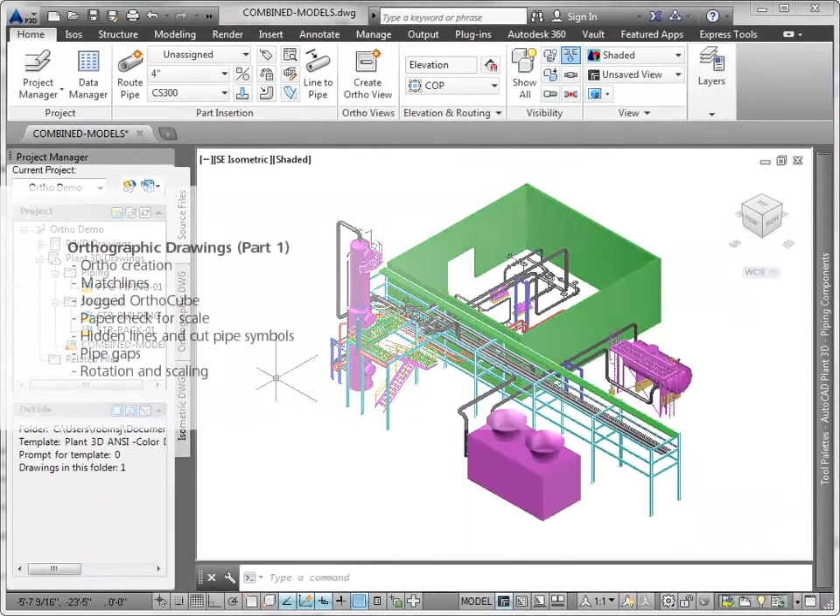In this video, Orthographic Drawings Part 1, I'm going to show you ortho creation, match lines, a jogged ortho cube, paper check for scale, hidden line representation styles and cut pipe symbols, pipe gaps, placement, rotation and scaling. In Part 2 we'll explore the ortho section of project setup, including paths, elbow centerline display, editing the title block, and layer mapping, and we'll also look closely at annotating and dimensioning.

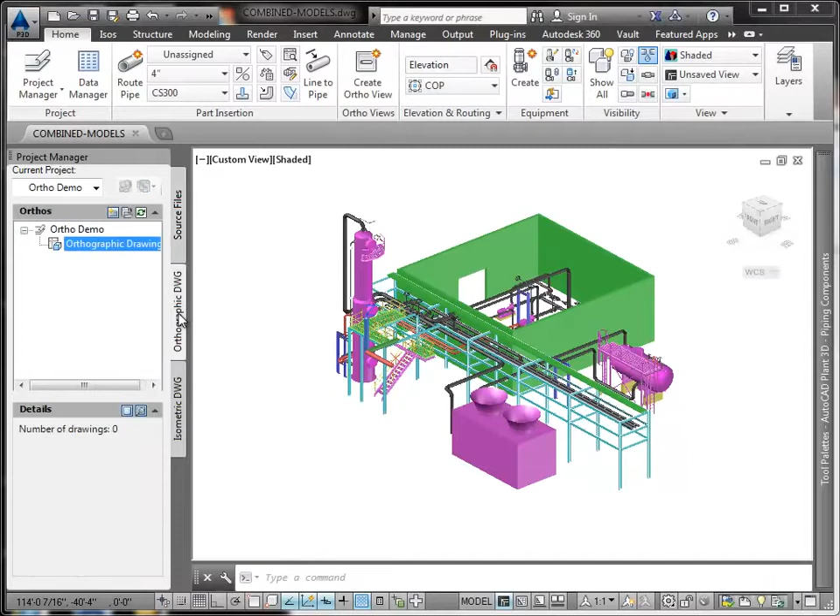I've created a project called Ortho Demo. This model includes XREF, structure, and piping models. I could start by clicking Create Ortho View on the ribbon, but for this example I'll go to the Ortho tab in the Project Manager and create the new ortho there. I enter a file name, in this case Plan View, and then click OK.

Now I click New View on the Ortho View ribbon. A preview drawing displays the transparent green ortho cube, which defines a clipping range and is the only object that can be edited in the preview drawing. The transparent red side shows the view selected, the top view.

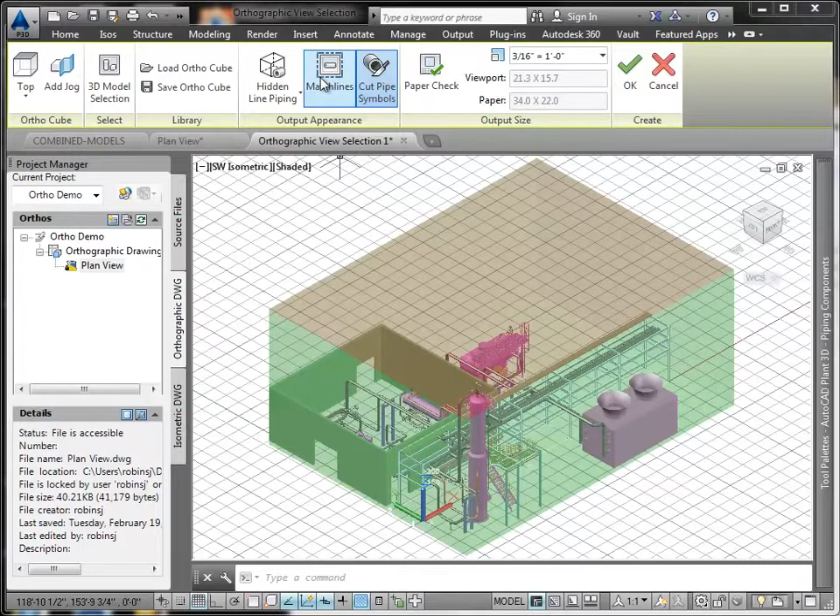Clicking on match lines will create match line annotation automatically. Clicking Paper Check in the ribbon allows you to quickly check the scale of the drawing. The Hidden Lines Piping button allows you to select where the hidden lines are to be shown dashed. Now I can click OK to place the drawing view in the sheet and start the drawing creation.

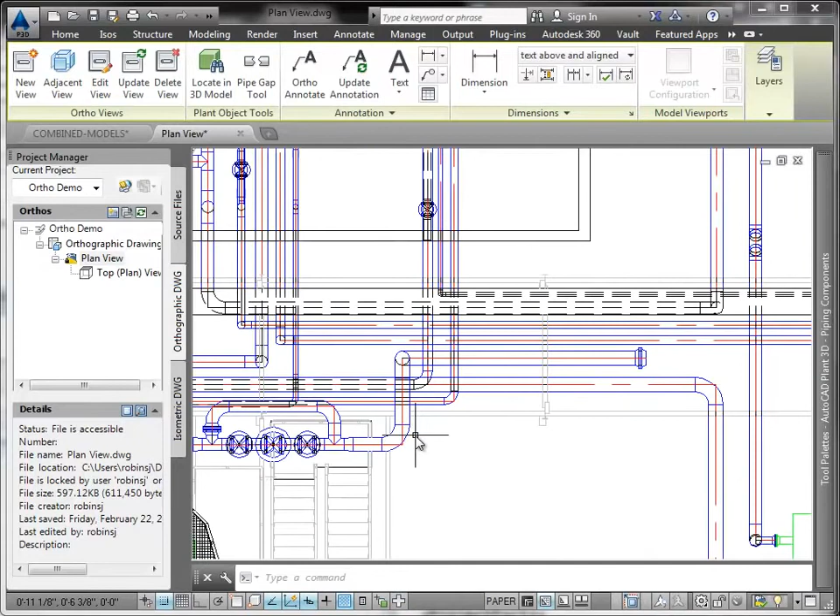So here is our plan view. Notice the dashed lines for hidden pipes and the match line annotation.

Now let's edit this view to create a jog in the ortho cube. We click Edit View and select this view. Now we'll click Add Jog in the ribbon, and click on this rear bottom edge to create a section jog, as you see here.

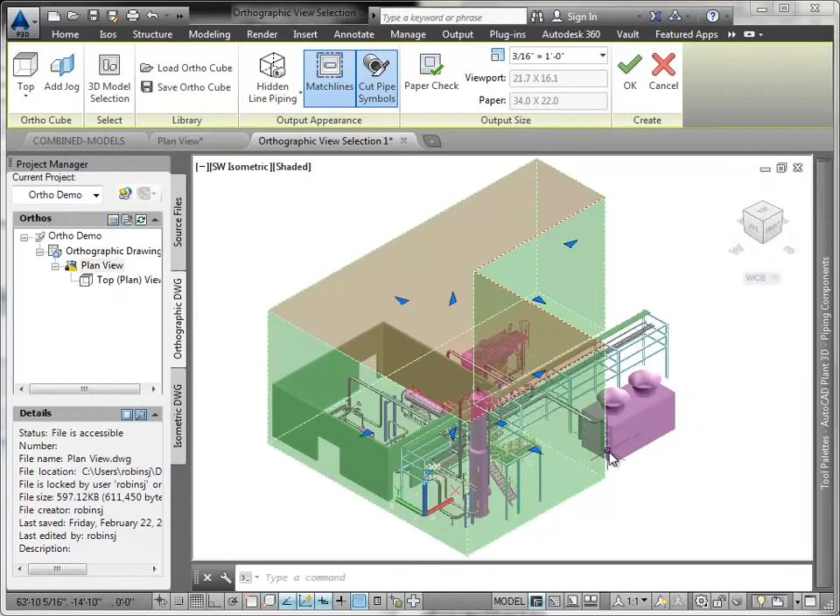We can switch to a top view to adjust the jog. We simply move them around until we have a satisfactory view. We can change the type or whatever, then Create the New View automatically updates the view for us with the new jog.

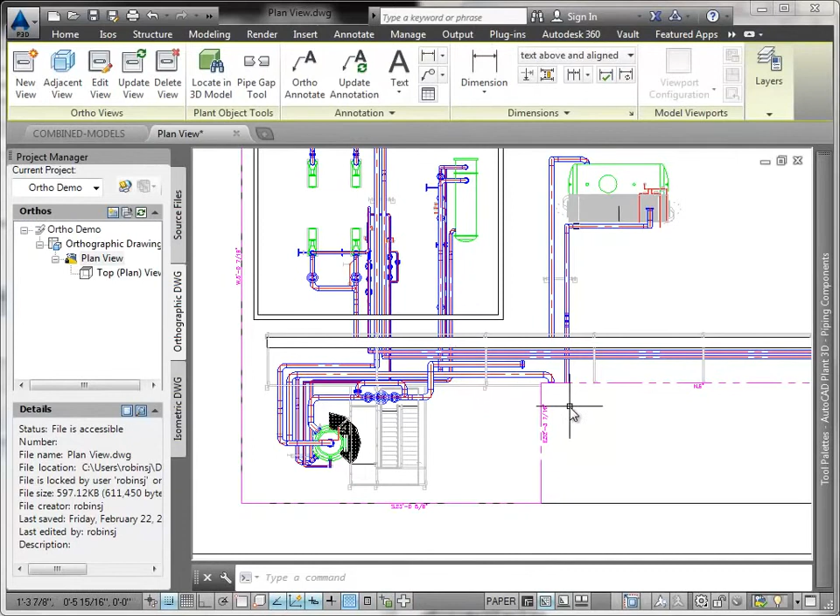Now here's the new view. We can jog as much as we like to create a complex jog.

Now I'd like to show you how to make a gap in a pipe to see what's behind. Using the Pipe Gap tool, I select the pipe, define the gap by using the grip, and then update the view.

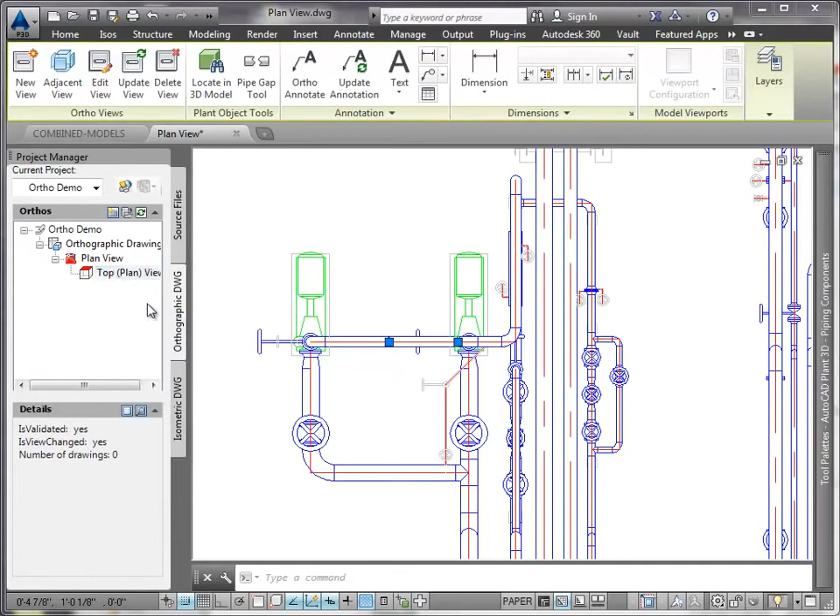Here we right-click on the view. Now you can see the hand wheel.

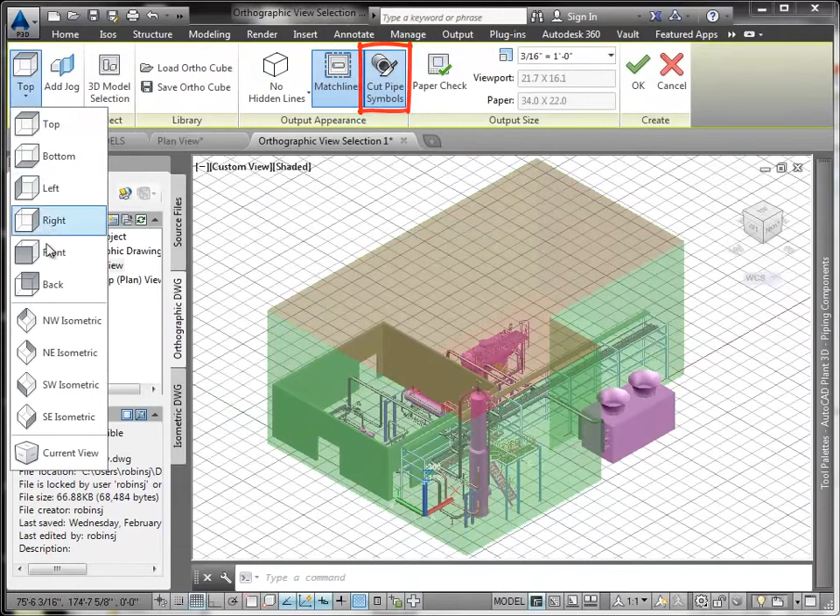So now let's quickly edit the view once again to show you cut pipe symbols. This time, instead of top, we'll select the front view. Cut pipe symbols are set to show by default. When we zoom in, we can see the cut pipe.

Now let's go back to the piping model and create another drawing view. I'm going to prepare the model by selecting the line number of interest and the equipment. We've used the Select by Line Number and then the Hide Isolate commands in order to prepare our model.

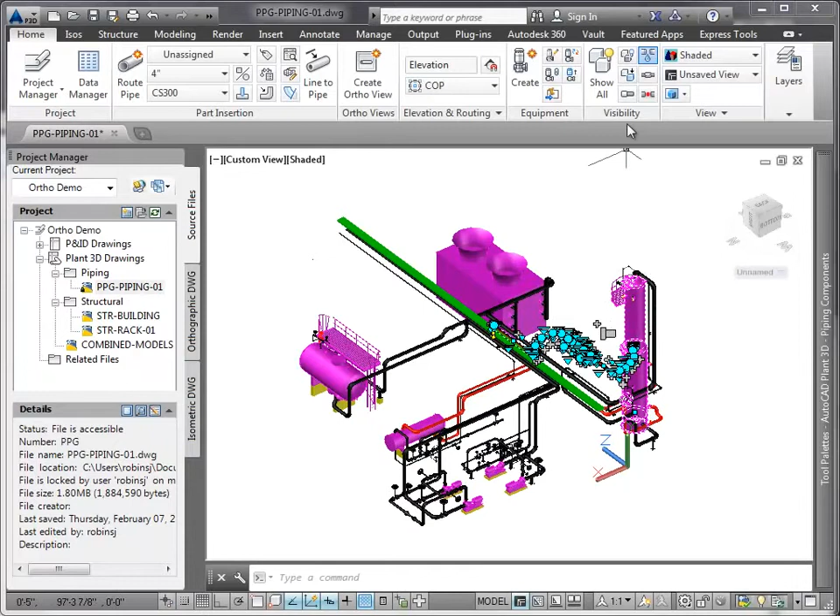Now we're done. We click the ribbon command and click Create New Ortho View. We create a new drawing called Line 10001 and click OK.

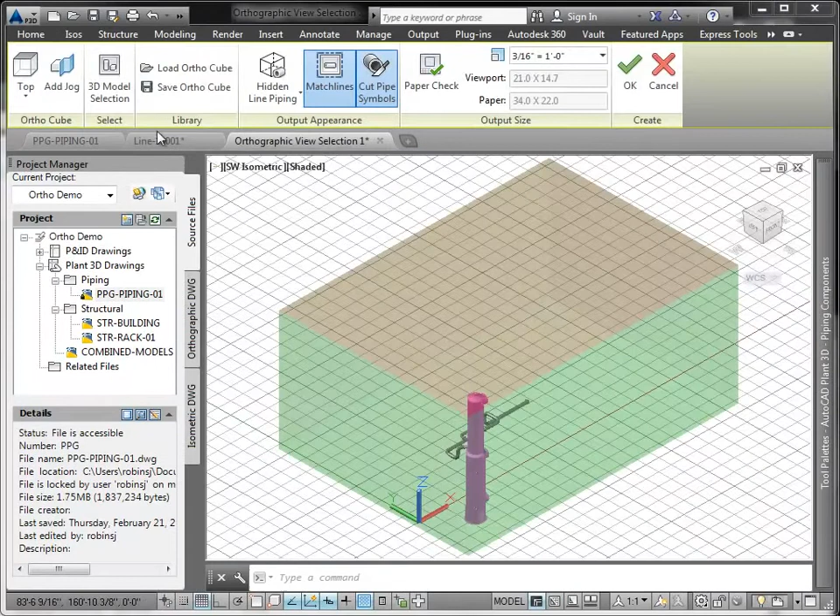The preview drawing appears, and this time I'm going to add another model by choosing to add in one of the structural models. Then I can see my pipe on the pipe rack in the ortho cube.

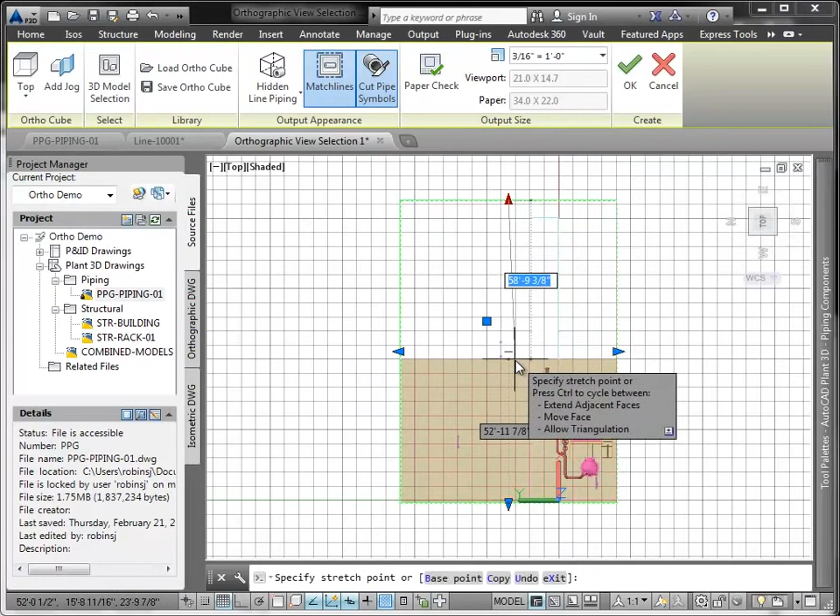Now I'll move to a top view, which makes it easier to set the cutting plane, and I'll resize the ortho cube. Let's bring in the sides a bit so we're clipped to where we want to see.

Now we can save this ortho cube by using the Save Ortho Cube command. We simply give it a name and click OK.

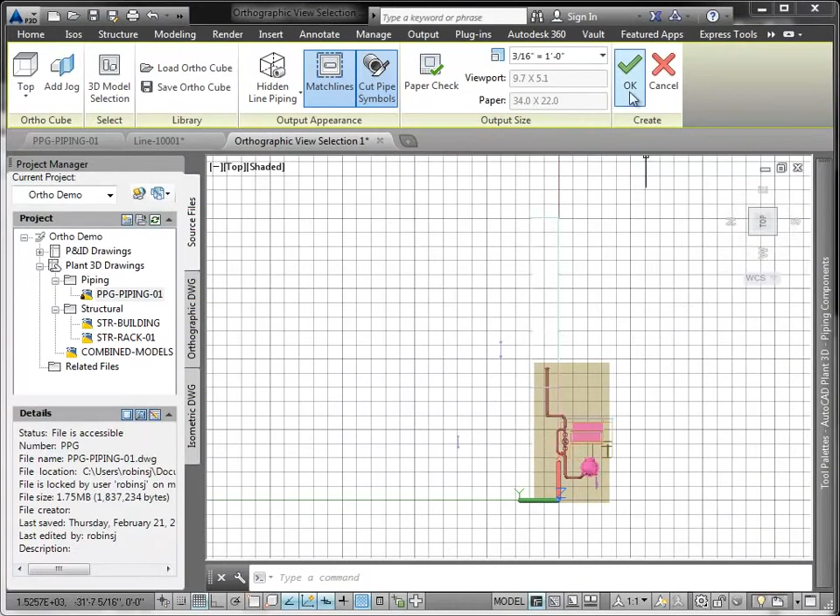Now let's go ahead and place this view in the drawing in the upper left hand corner. There we go. Now let's create another section.

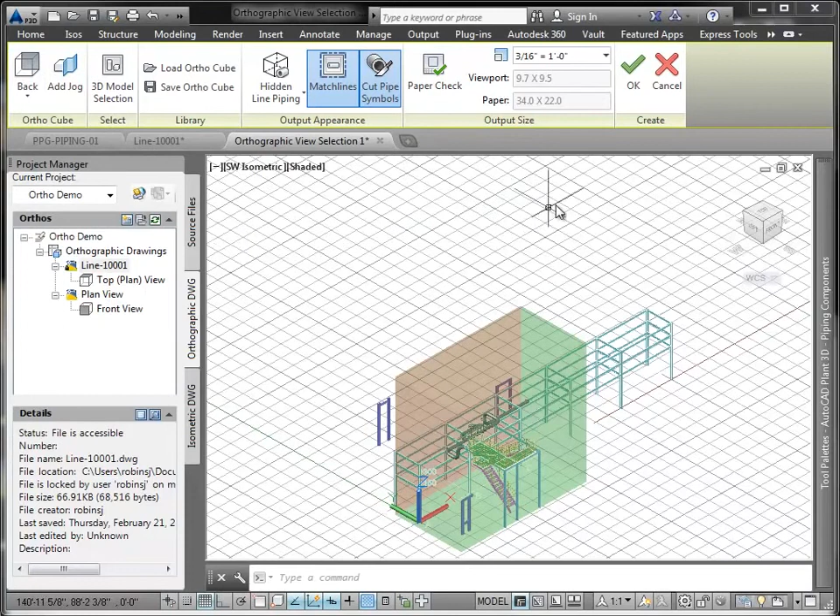So we'll click New View, select my models, and we now load the ortho view that we had created before. Let's move to a back view, and now we'll generate the next view as you see here.

Now let's create another view. This time we're going to select just the pipe, and we'll reuse the same ortho view to set our cube dimensions.

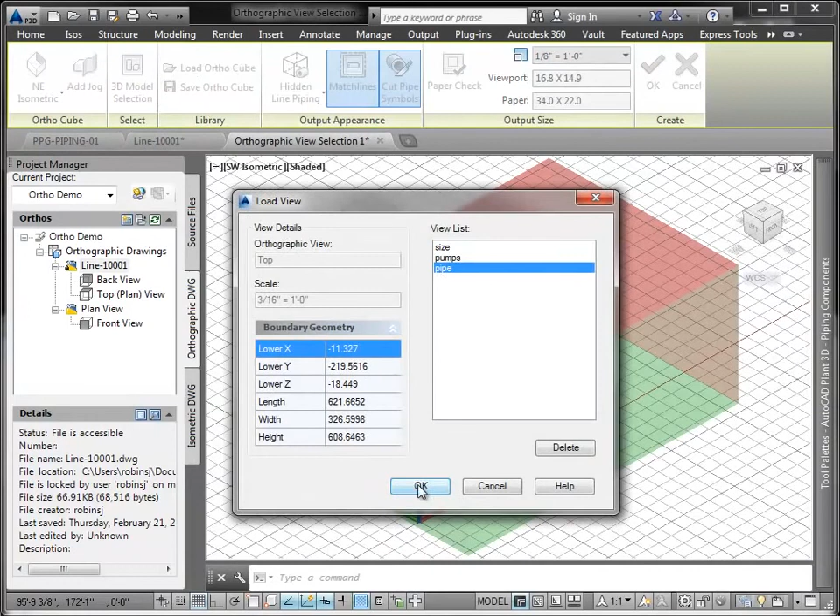And this time let's create an isometric view. We can use the cube to rotate that view in any direction we like, as you see here.

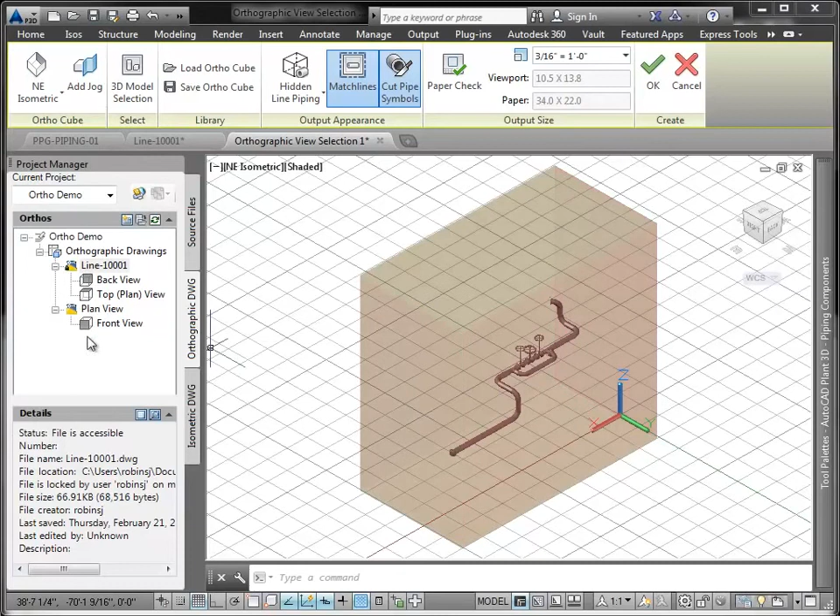As I place it, I see I'll need to adjust the scale. I can use the in-place menus or the command line to select the new scale for this particular view.

So let's go ahead and select a more appropriate scale and place the view where we want it. There we go, there's our new ISO view.

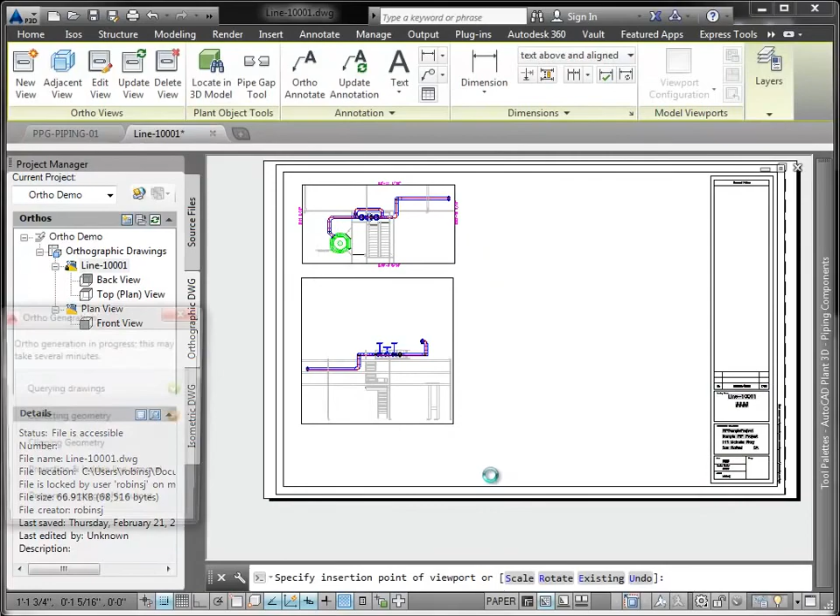Earlier I published a 3D DWF of the same line and added it to my ortho drawing using the DWF underlay functionality. So now we have a 3D rendering as well as an ortho version of our pipe in our drawing. You can also use AutoCAD's rotate, move and align options to create ortho views aligned to non-WCS piping.

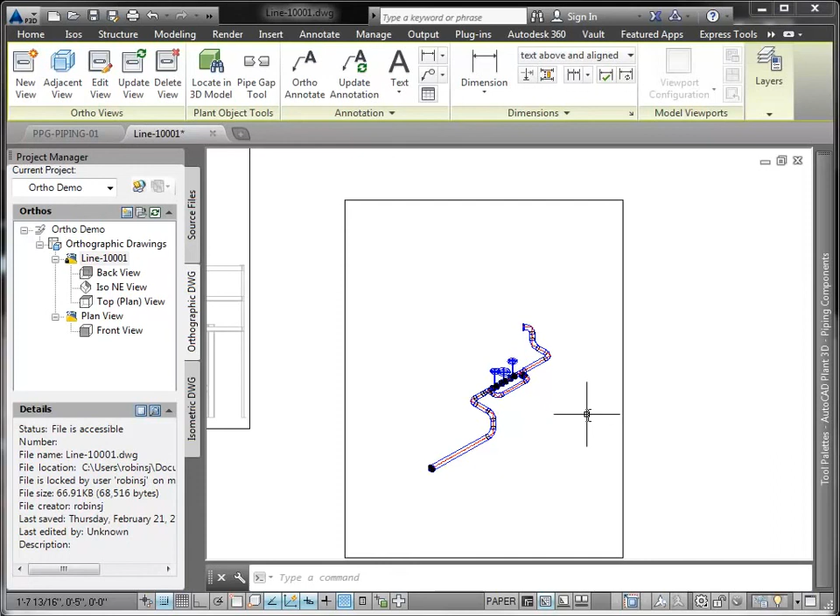As you can see, creating orthographic drawings with AutoCAD Plant 3D is simple and straightforward. In the next ortho video, I'll explain how to annotate and dimension ortho drawings. We'll also make changes to the model and update orthos and annotations.